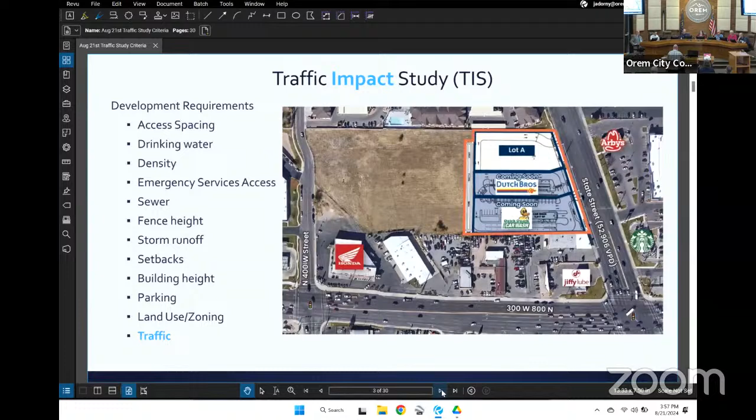However, traffic, you can count what's out there now, but after that, it's kind of a prediction. And so we're trying to predict what's going to happen. And that's where usually the disagreements happen, right? And so you can have 4 traffic engineers present something and they're all different because of the data going in. So we try to limit that confusion. I kind of said this a little bit boldly, that traffic will never get better, partly because it's hard to reduce traffic globally because people don't stop driving. So you can adjust it to different locations.

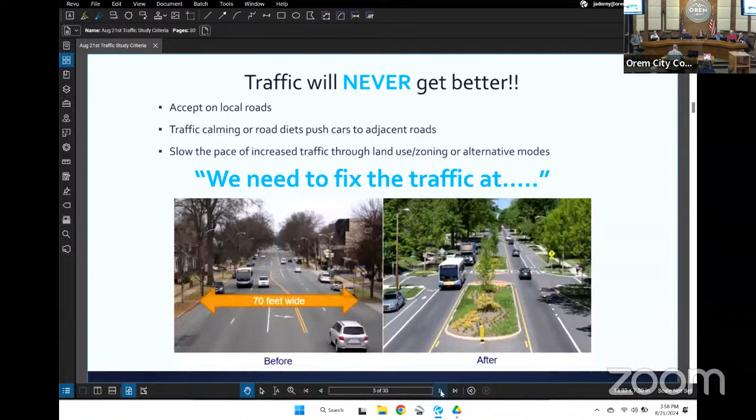I think I mentioned this. We need to fix traffic at this location. You've probably heard it or said it yourself. We can probably fix traffic at a spot, but it's going to push it somewhere else. So I don't see, and maybe someone can have an opposing argument, but I don't see traffic ever going down as a whole,

So when engineers say we want to widen the road, we don't do it in pipe lengths, a 10-inch pipe, a 12-inch pipe. It's 24 feet. That's the minimum you can widen the road to get a lane in each direction. So it's a big deal. And we recognize that, but that's the thinking of it. We want traffic to move better, but we also don't want quality of life down. So it's definitely opposing things.

I mentioned this humorously. Traffic studies have layers. That is because as we create a traffic study, we're adding conditions to it. I think you mentioned, Britton, we have an existing condition that we can quantify, and after that, it's a guess, right? So we look at the traffic now, that's measurable. Then we look at traffic in 5 years, that's an estimate. And then we look at traffic in 5 years with this project on top of that.

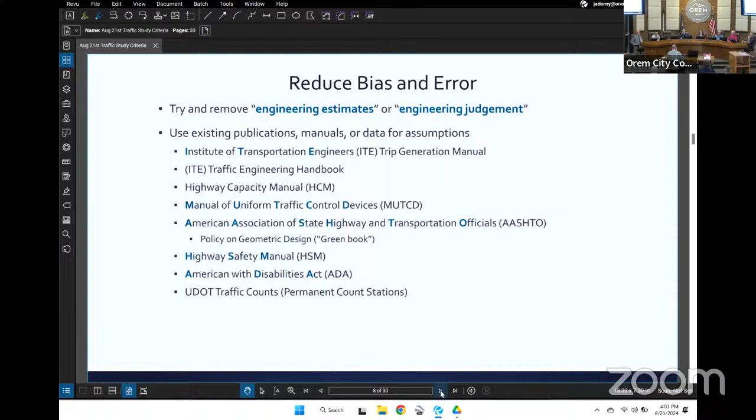And what we use is UDOT has permanent traffic counters all over the place. We try to find them close by. When I say close by, it could be 3 or 4 miles away. And then we just get an average of what's going on based on that data, because they count every day, all day. So there are permanent count stations. We try to get, again, the best data we can.

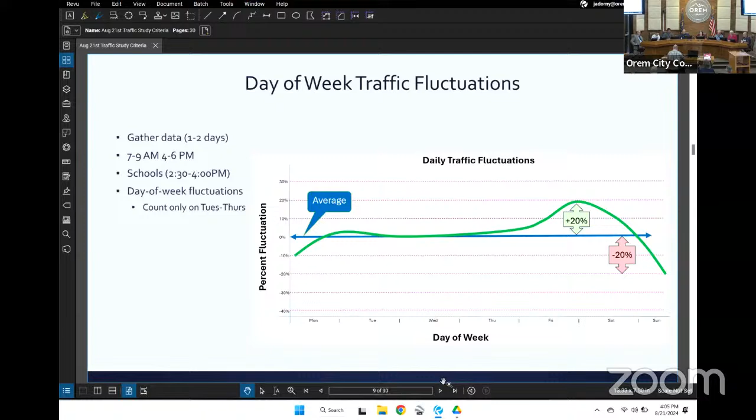But the point is that we want you as planning commissioners to know that if a traffic study is done based on our specs as a city, this is what they're supposed to be doing. And that's what we check. And so by the time you get a study, we've reviewed it 2 or 3 times, and I ask the developers, give me your trip generation and your distribution first before you do anything. Because if you get that wrong, everything else is wrong after that. So that's what we try to do for them.

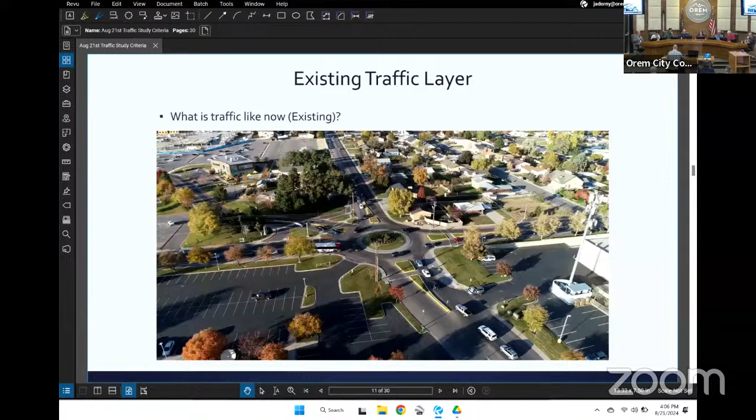And again, we talked about what is traffic like now. I don't know if there was a video link to this, but this is the UVU roundabout. I think we're hovering above a church building and Krispy Kreme is to our back, and University Parkway. So we look at traffic counts from an existing standpoint. What's the queuing doing? You can see a UTA bus over here. Are they backing up onto University Parkway? And so the existing condition tells us a lot. And this is a drone picture.

We talked a little bit about traffic modeling. A way to predict future traffic is using MAG's and the WFRC's traffic model that covers from Payson to Brigham City. So as part of the master planning process, we made that more detailed. If you look at it like pixels, MAG might have one big pixel for this part of Orem. We come in and make it smaller and carve it out better. So when we do our own master plans and studies, it's better quality because they just can't do that much detail. So we look at WFRC's and MAG's model.

We also look at the local micro simulation models. We'll talk about that. And then what we try to do is, I think I showed this last time. Looks like my browser doesn't like it.

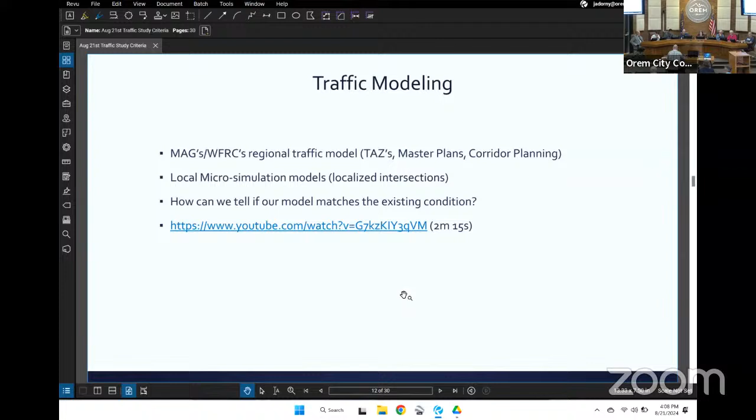That was a little simulation model that basically crudely tries to duplicate what you see in real life. And if you know that your model doesn't duplicate real life, how is it going to duplicate the future correctly? So we have to go through and modify the model to make it match what we see in real life to establish a baseline. And then after that, it's like, okay, if this matches now and we increase the volume here, then we trust it. But there's no way to confirm it because you're looking in the future. But we do our best to do that.

You mentioned trip generation. It's basically how much traffic the site is going to generate. And there's an ITE, or Institute of Transportation Engineers, trip generation manual. It's a national manual. It's this thick, and it's got land uses, bowling alleys, C-stores, gas stations. They put out a request for data. They're lagging. They're always 6 or 8, 10 years behind because new things show up.

And if it's a redevelopment project, so if you're tearing down an apartment complex and you're building a higher complex, you're supposed to take out the traffic from that complex and subtract it out of the new traffic so that there's a net gain or loss. And if it's new construction, it's just all new trips. It's just 100% new.

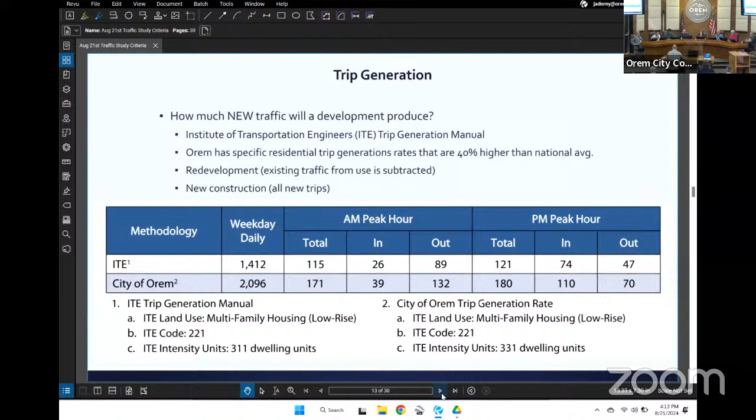But once a McDonald's is built, no one goes back and says, did we get that traffic right? You know, because there's so many other things affecting just that area. So let's see, speed it up here because we're getting close.

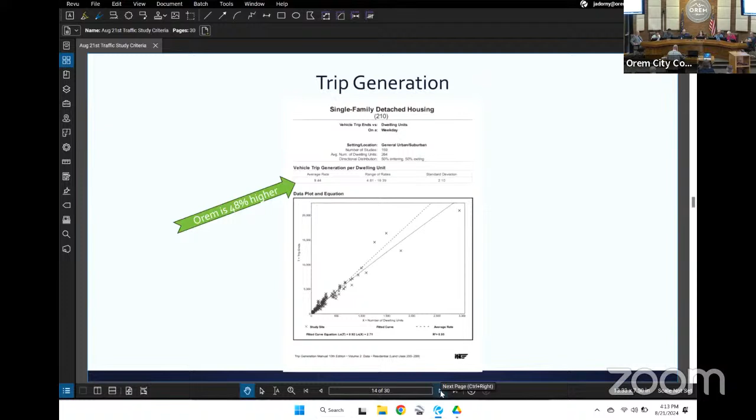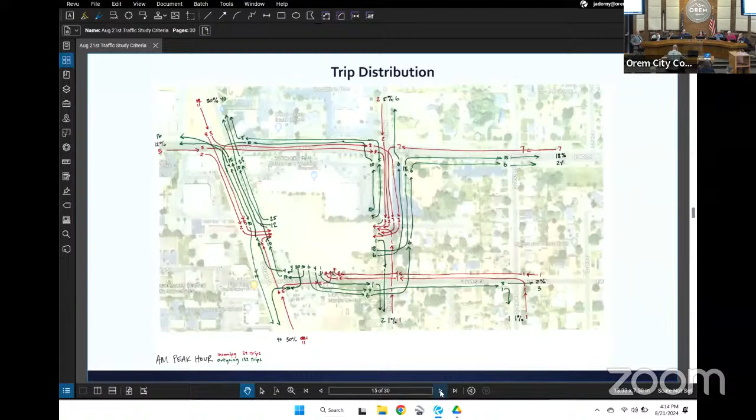Trip generation, this is just a page of the manual. Some of the data, we can go through it, but that's what we look at to say, okay, those lines and those little dots have to do with where the data points come in, and it has to do with the average. This is an actual drawing of people trying to estimate where traffic will come and go. It's a manual thing. You actually physically put in, if I was driving down State Street and I wanted to go over here, how would I get there? And this is what we review as part of a traffic study that comes in.

We talked about pass-by traffic. If you're a McDonald's or Chevron, you're going to want to go on a road that has a lot of traffic because people aren't going to go out of their way to go to fast food. They're going to pull out and go. And so depending how far people will go out of their way to go to that item and that site will depend on how this diverted link down here, these diverted traffics will go.

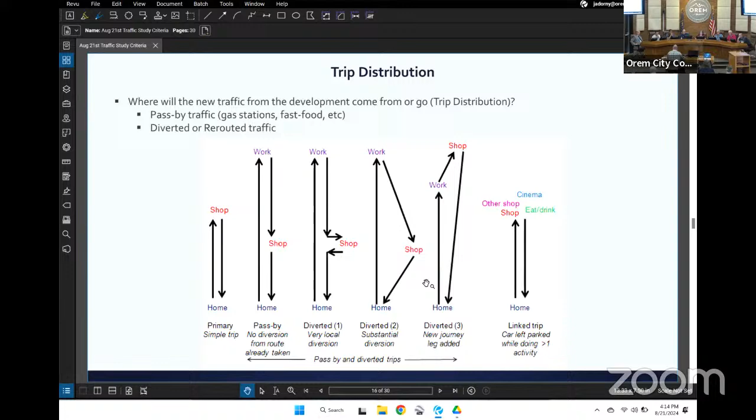And different land uses have different diverted links. When we do a traffic study for Chevron, 75% of the traffic is not new. It's just, they're stopping there because it's convenient. But if you're a dental office, 100% is new, because who's going to stop at the dentist on a whim? So depending on the land use, we look at how to affect the diverted links.

We talked a little bit about output level of service. This is where we get D. These are the parameters of how the program spits out level of service. It's based off of the average number of seconds each vehicle waits at a light. So if you're at an unsignalized intersection and you're there 30 seconds, it's level of service D. Now, oftentimes you wait at a light, you just hit the red, you're there for 2 minutes guaranteed because it's a 2-minute cycle almost everywhere.

So it's average and it's an estimate, right? It's a black box trying to duplicate what actually happens, because you have reaction time. And if you notice with the cell phones, people are like, what are you doing up there, right? There's a lot of honking going on, but there's a lot of people on their cell phone looking, and then all of a sudden it's green, and you'll notice that reaction time due to culture and society is way different. Now, I don't know if that's accounted for, but that's an issue, and that's calculated.

If it's an area that has a lot of recreation and you have a lot of visitors from out of the area, there's a factor to put in there that says they're unfamiliar, and so they're looking around. But if it's just a regular commute, so there's factors to adjust that. But this is kind of the calculation that the federal government came up with that we use.

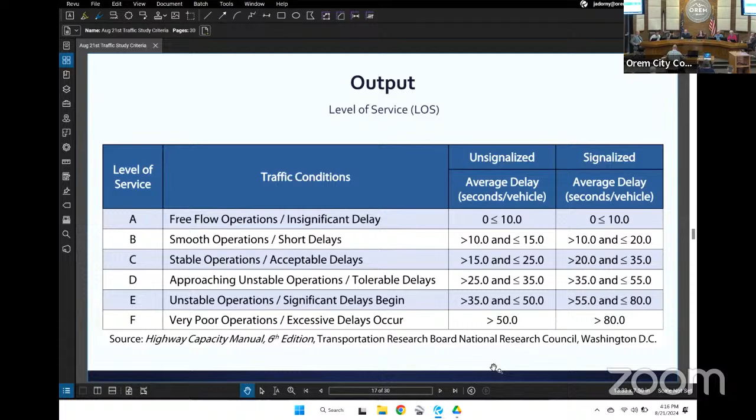Here's an output. It's hard to see, but all this data is all the output when we look at an intersection, US 89 State and 800 South: green time, pedestrian time, HCM platoon ratios. It includes all of these things. And that's where we can get in and try to make sure that we match the existing condition by messing with these parameters.

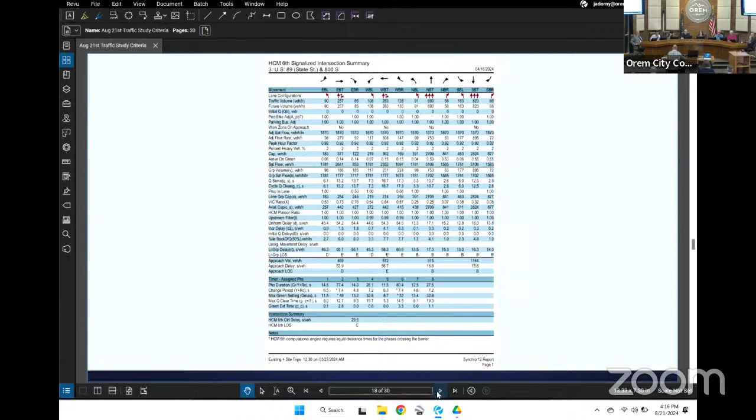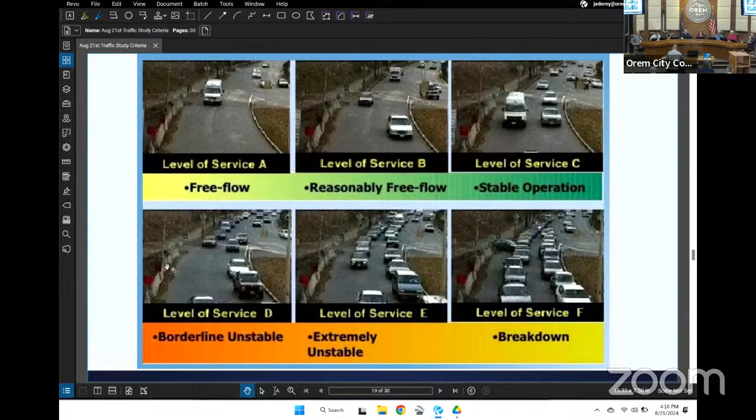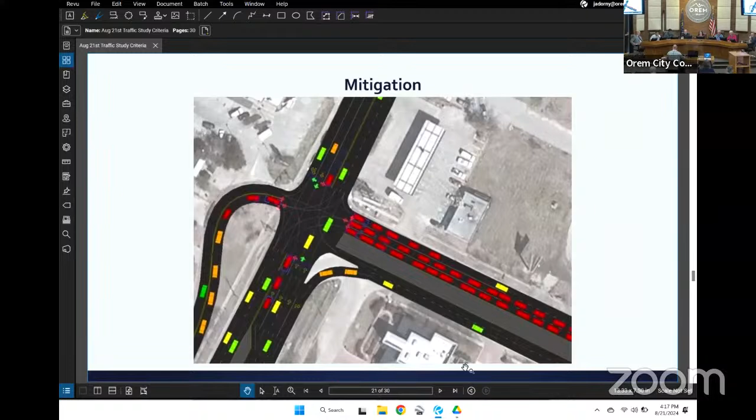So we wrapped this up last time with this slide, just emphasizing we rely on existing data and manuals that we try to direct information and get information from. We do layer the scenarios, as we don't just go, here's the end of the study, and there's nothing in between. There's always an in between: if we do an improvement in 2030, then it must be there in 2050, so we include it. But if it's not needed till 2040, we don't show it in 2030. So as you layer it and we look at mitigation measures, we include those in the next layer. So that's what the layering does.

We also match the general plan and TMP. When we look and do studies, we look at the neighborhood connectivity plans, vehicle queuing. Safety is a little bit obscure. We can look at crash data in the past, and you can look at safety from a sight distance and things, but sometimes you just can't quantify bad drivers. So we try to address that in a qualitative way. Sight distance is calculated based on clear zones. Mitigation is what we recommend at the end of a study.

And I throw road impact fees in there because when a developer says we don't have to do anything, we're fine, it's hard to read that from a traffic study. We don't recommend anything. They are paying impact fees that have to be spent on roads in the city within 6 years. And so there is an element that whatever they're building, there is an impact financially that they're paying.

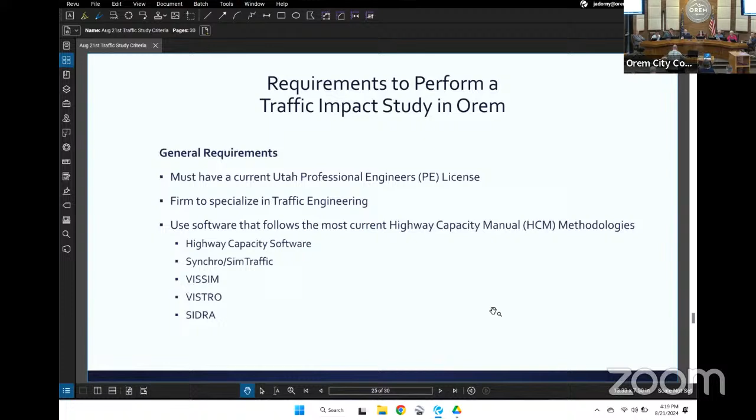We talked about the trip gen locally adopted. The national standard is 10 trips per house per day. Orem is 14. That 10 is rounded up. It's like 9.32 or something, but it ends up being a 40+% increase from the national average. And we don't get much pushback; I mean, it is what it is. When we tell developers to change it, they do it, and they don't try to argue why. I think they just recognize the families and the schools that we have. I've already shown you this picture, just to emphasize that this level of service D is only during commute times. So that's what we're looking at.

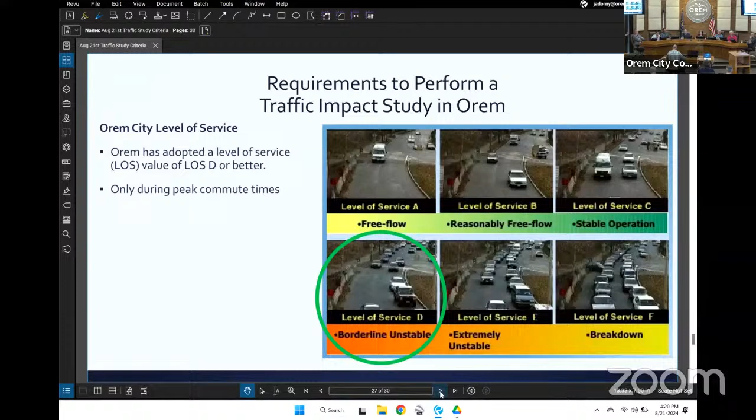We do have levels and tiers of traffic studies, similar to UDOT's. There's a level 1 and a 2A, 2B, and a 3 and a 4. And that has to do with, we're not going to make a developer do a whole lot of work if there's 100 trips per day or less, because that means there's 10 trips per hour in the PM peak. And so each one of these has a buffet of things to do, and it gets more complicated. We're not going to have them pull crash data on a level 1. We can basically negotiate what improvements we need to do. And as you get more complicated, we make them scientifically prove why they think they can or can't do things. And so we rarely see a level 4.

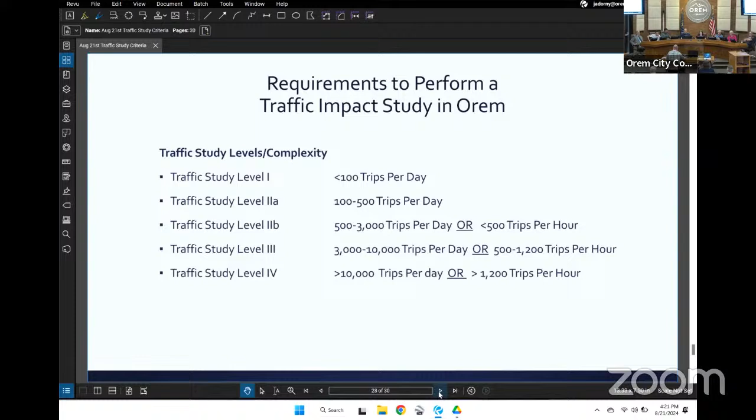The level of service output, this is kind of what determines what mitigation. The crash data: UDOT used to publish their high and low crash rates. That is no longer available. So it's hard to compare what a good crash rate is, and you're smiling because you know why. The liability of why are you showing this high crash rate for 20 years and not doing anything about it?

I live off Highway 6. It's called the death road. And I live by the intersection where they get hit every couple of weeks.

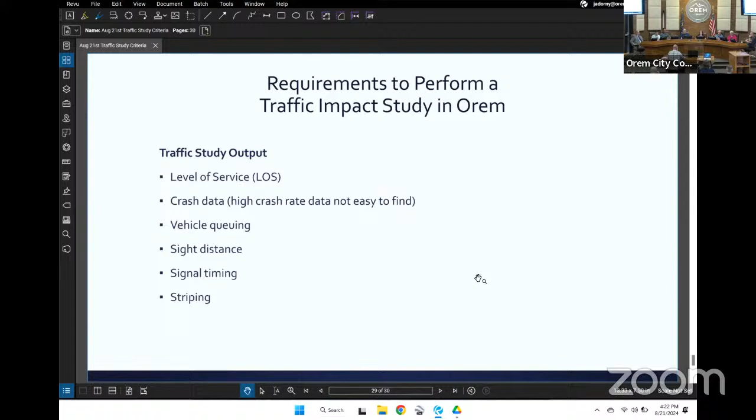So they don't publish what's high and low, and so it's hard for us to compare what's an acceptable crash rate, but it is available. If we have 5 or 6 in a year, we know that's a problem. Vehicle queuing, we can manage, and look at sight distance, again, triangles, when you're at an intersection, other bushes in the way. Signal timing, the traffic study lets us adjust our signal timings, and we look at striping and signing in general.

I think that's it. Give you enough time to eat. Thank you. Any questions? No?

I guess not. So, we have traffic staff in both Public Works and Development Services that get together and review all these things. It's not just me. We have technical staff that creates these Synchro models and looks at signal timings. And so there's a team of people that are involved with traffic, not just one person.

How does Orem compare with other communities in Utah County relative to the level of traffic? You said we're a D. Do you know what the other- Like most are at D. It used to be C and UDOT was D, and now they just can't maintain a C. It's just too hard. And the worst part of the day is probably 15 minutes on city streets. So if we can get through the 15 or 20 minutes, especially around school zones, for 22 or 23 hours of the day, it's okay.

So we as a state, I think, have it pretty good compared to others, but from a city comparison, it's just like every other metropolitan area. Provo and Orem is going to be worse. As you get out to areas, it's a little bit different, but Eagle Mountain, to get out there was a pain until they built roads. So it's just the high growth area versus established, and we're established. So it's pretty standard compared to our growth.

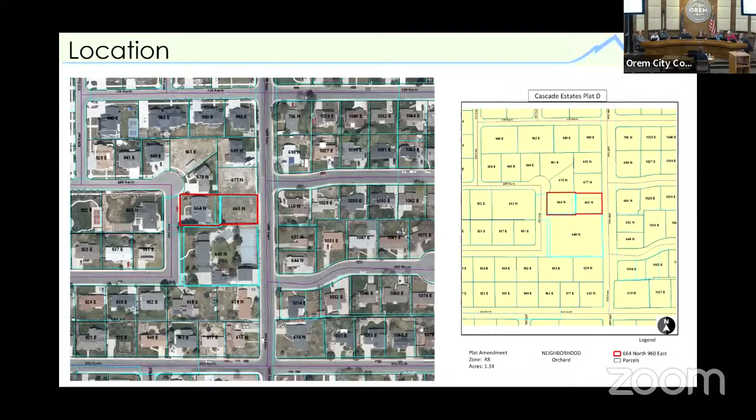All right. So we will begin with item 3.1, which is a plat amendment approving the plat amendment of Cascade Estates Plat D located generally at 664 North, 960 East in the R8 zone. Cheryl? All right, so this shows the location and where the two lots are. As you can see, it's in the R8 zone. And this will only affect that backyard property line between the two lots. It will not affect any other lot around them.

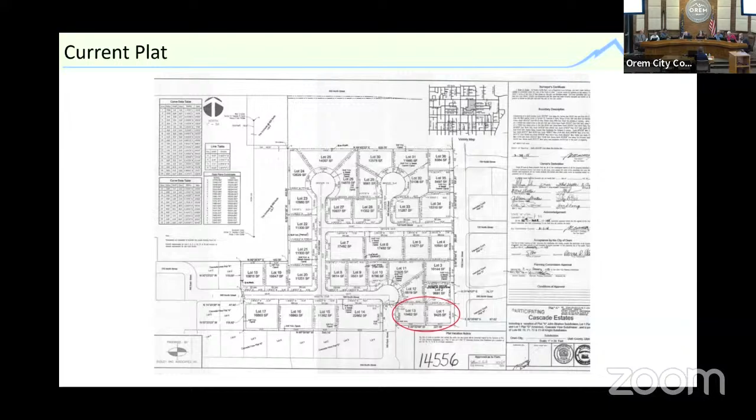So this is the existing plat showing where those two lots are. And this is the proposed plat. And you can see where the property line almost lines up, and it's a little bit to the east of the lot to the north. Oops, wrong way, sorry. But this one shows how it's moved west. So they're just moving that back property line. This is the two street views from the two ends of those two properties. And did you have any questions for me?

Any questions? Okay. Is the applicant here? And would they like to come forward? Do you have anything to say? Anything? Okay, then thank you. All right. We don't have any further questions. Should we move to motion?

Motion to approve the vacation of lots 1 and 13 of Cascade Estates Plat A and approve Cascade Estates Plat D located generally at 664 North, 960 East in the R8 zone. Do I have a second?

I'll second it. Okay, so Brendan moved and Jim seconded that we approve the plat amendment. Rod? Vote. Yes. Aye. Aye. Aye. Aye. Aye. Okay, that's unanimous. The plat amendment is approved.

Okay, item 3.2, also a plat amendment, amending all the HCA Timpanogos subdivision parcel A and approving HCA Timpanogos subdivision first amendment located generally at 650 West, 800 North in the C3 zone. Cheryl? All right, so this shows you where it's located and it is in the C3 zone. This came through, I think, in December or the beginning of this year to have this plat recorded.

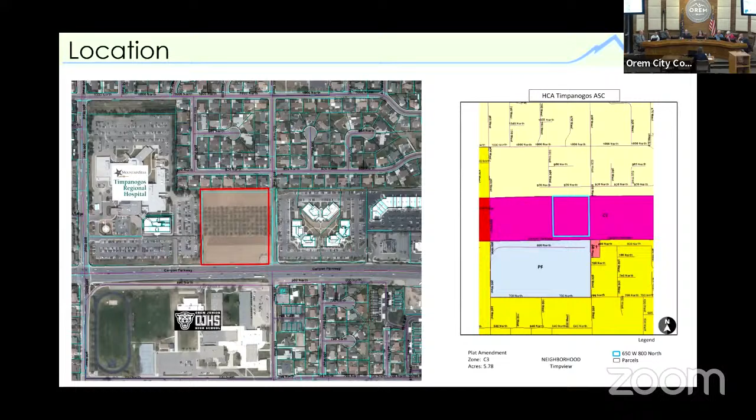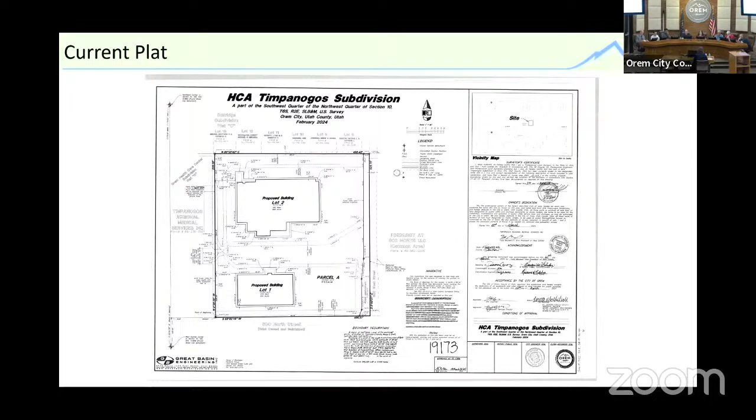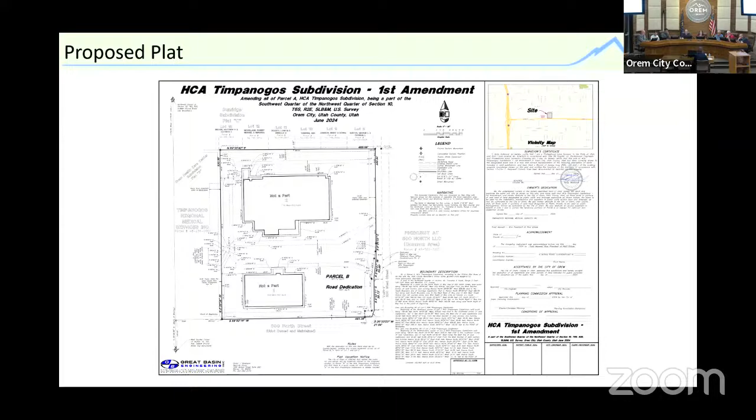In the meantime, they've been putting a new intersection in there at 600 West and 800 North. And this plat did not make it possible for that pole that supports the traffic signal to go. So this new plat is only changing that southeast part of the plat to accommodate that traffic signal pole. This shows what it looks like now. And did you have any questions on this one?

Just for clarification, is this so they can put the light to align it with Orem Jr. across the way? Taggart, I believe that's true, correct? I know we discussed that it might happen, so they're just doing it from the beginning. Yeah, this is actually a UDOT project. So they've hired a consultant to design that, and then they're building it. And then we have a small project on the south side of that intersection to align the vehicle lanes striping. Thank you. And we asked them to do this, so it's at the city's request. Okay.

Is the applicant here? Would they like to come forward? Okay, then if there are any other questions from the planning commission? Okay, then let's move to motion. Someone like to move? I move that we approve the planning commission recommendation to amend HCA Timpanogos subdivision parcel A and approve HCA Timpanogos subdivision First Amendment located generally at 650 West, 800 North in the C3 zone.

Do I have a second? Second. Okay, Rod moves and Britton seconds that we approve the amendment of the plat for HCA. Let's go to voting. Aye. Aye. Aye. Aye. Aye. Aye. Aye. Okay, the motion's unanimous and that plat amendment is approved.

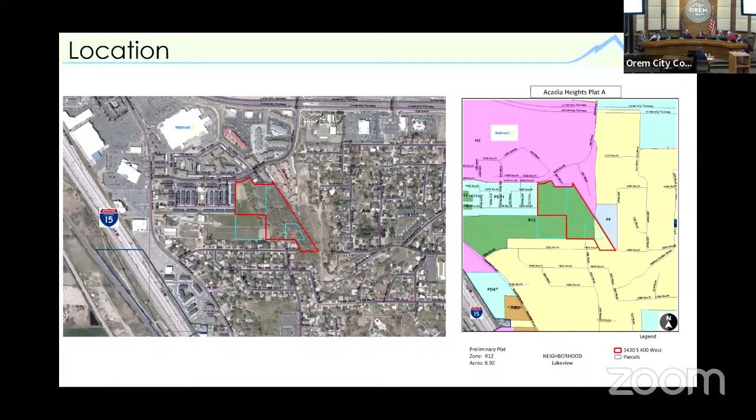Then we'll move on to item 3.3, which is a preliminary plat, approving the preliminary plat of Acadia Heights Plat A and B located generally at 1430 South, 400 West in the R12 and R8 zone. Cheryl? Okay, this shows you the location of this property. You've seen it before. It came through before as Sherwood Haven. It's now going to be Acadia Heights. And if you look at the zoning map, you can see that the green part is R12, the light yellow is R8. So this will have two separate zones. That's why there are two separate plats.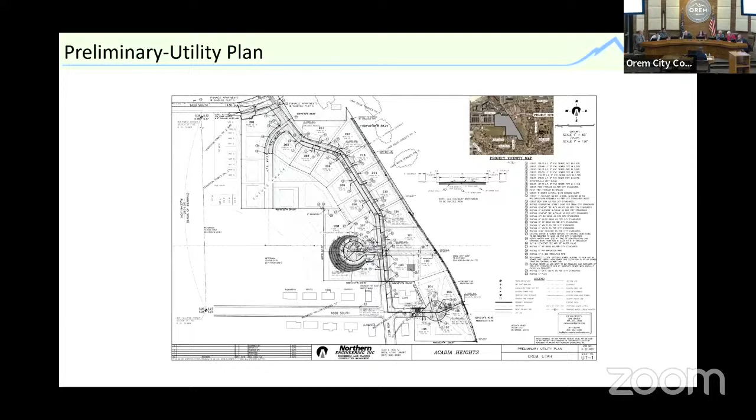This is just a preliminary utility plan. If you look on the south side of that cul-de-sac, there is going to be a 20-foot sewer easement that will extend through there to the property to the east. And that's at the city's request. And that's what the agreement in your packet was referring to, so that we will help them pay for that. That will give sewer access to those properties on the east. These are the grading plans. I'm not sure how much detail you want to go in on those.

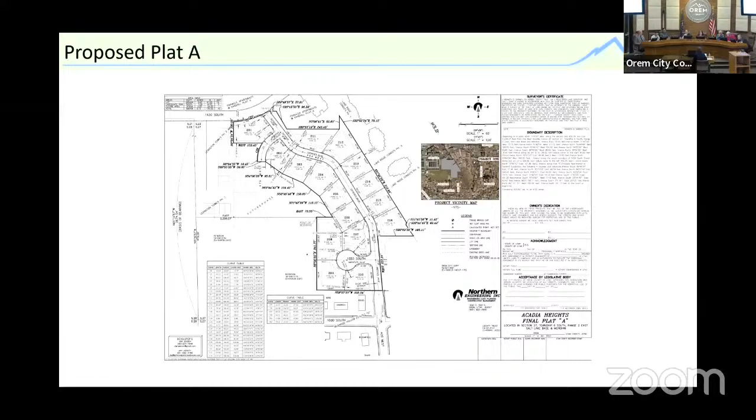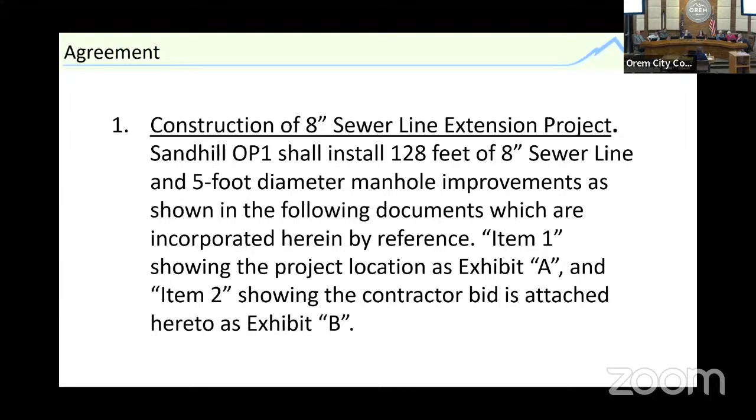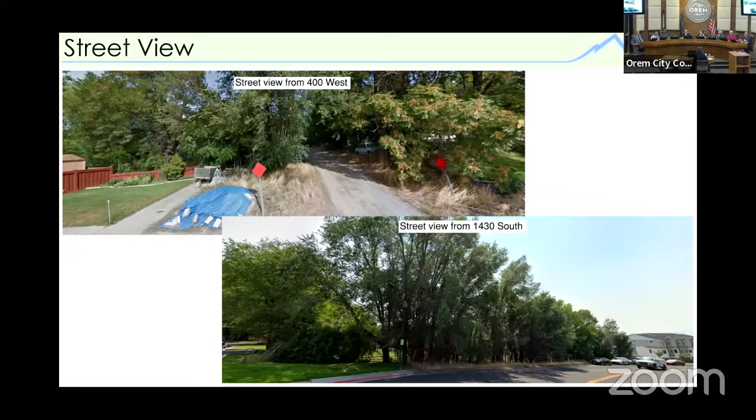I saw 25 homes, 25 properties. I believe there were 24. The applicant could probably clarify that. And what's the estimated space from home to home? I'm sorry, what was the question? The estimated gap from home to home?

So it depends on which zone it is. If it's in the R12 zone, they'll have 100 feet of frontage, and then the different setbacks are in the zone. In the R8, there's 8/20, with a minimum of 8 feet on one side, and then it has to total at least 20. So you'd have 8 feet on one side, 12 on the other. And I'm not 100% sure what it is in the R12. It's not as common. Is it the same? Thank you.

And this is just kind of a follow-up because we've had this property several times before: the city council voted to eliminate the other connections, but not the one between 1430 connecting down to 400 West. Correct. I'm not sure that they eliminated any of them. I don't think they did. But they didn't need to connect back up the hill, because I know there had been a lot of discussion about that. Yeah.

So this will connect through from 1600 South up to 1430 South. Okay. And that's why it had to be noticed, because it's through a connecting street. Yeah, it will connect from the north to the south, and then the one connection that's not going through would be the far south end going through to the east. That one's not connecting. And I assumed that by the cul-de-sac. And that's nice that you're still going to get the sewage up so that those properties aren't landlocked. So this 16th South will be a cul-de-sac. Okay. Any other questions for the city?

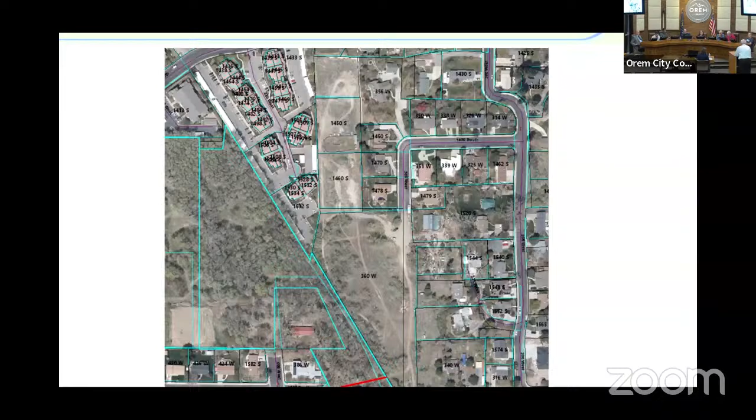That's my only concern, because we're doing some engineering for those property owners. And I question whether it's prudent to have this whole area be dead-ended with only one access. That's my only concern. Thank you. We have had extensive conversations about some of this in previous meetings, and that's partly why I'm bringing this up too, because we're seeing a cul-de-sac here instead of it continuing. I don't know if that's a Taggart question or a Cheryl question to answer, but thank you. Thank you.

Because there are still those concerns about those landlocked ones, so 1600 could still go down. It could, well, yeah, on the top of the hill. Yeah, so this could go up and down. So it's still there, it just doesn't go out towards I-15 anymore, but it still can go east. The connectors are still there on the map, so if we choose to draw the roads through there, we can.

Well, the question is, would they finish 1600 to connect with 300 West? There is a lot of opposition to connecting 1600 South through from the property owners there. But on the top of the hill, would that road get completed? Would you bring 300 West down to meet 16th South? Is it 360 West? Sorry, it's really tiny on my screen. You'd have to in order to get to the park, for one.

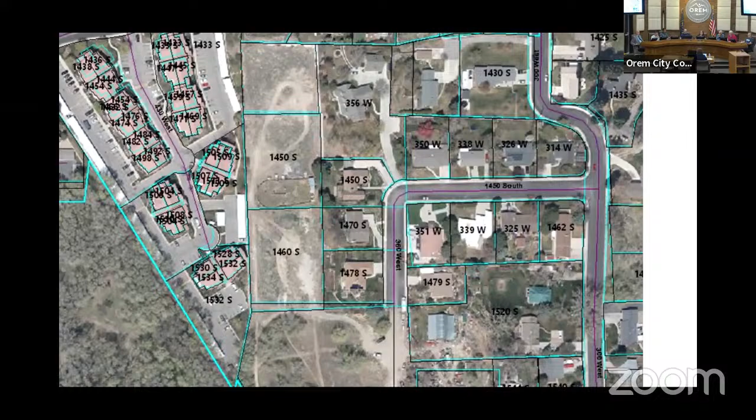We have looked at that and there is a challenge there with grades. There's quite a big drop off from the cul-de-sac going up to the east. And then at the top, where you're looking at developing, there's a 20 to 30 foot drop off from the east side of that city owned property down to the west side of it. So there are some challenges there. And like was just mentioned, with the private property owners along 16th South, that would all have to be worked out in order to make that work.

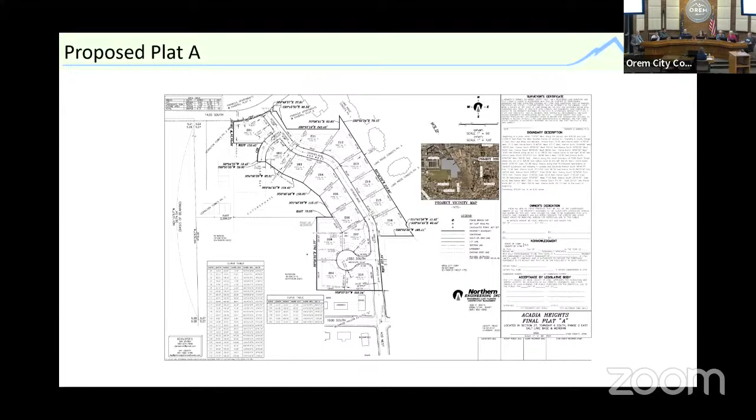So more conversation forthcoming. Yes, and then the extension of the cul-de-sac on the north, I think the only way to make that work would be to go to the city council and get some type of exception to the current ordinance, which is, I believe, 650 feet. And it would extend quite a bit past that, so it just would not be allowed. But those landlocked properties, this doesn't negate any of that, because these other properties are already in the way of going a different route anyway, so they couldn't go through the park.

Yeah, those are all good questions for development in the future. The issue in front of the planning commission is this current request for a preliminary plat. Does it comply with our code at this time? Those are important issues, I don't mean to minimize them. We are working on them as a city, and we'll work with any potential developers to come up with good solutions for those other properties. But whether this happens or not, the issue with the other undeveloped properties is still there. Yes, thank you.

You don't like our squirrel? I don't like ours. A rabbit hole.

No, it is somewhat valid because of the conversations we have had around this, but I do agree that it is not dispositive to what we're doing today, and that answers that question. We can come back to what's before us, because now we have cul-de-sacs under 650 feet, the road connections are there, and it meets code. It's R12 where it's R12 and R8 where it's R8. Do we have any additional questions from the planning commission regarding this property? Okay. Then should we move to motion?

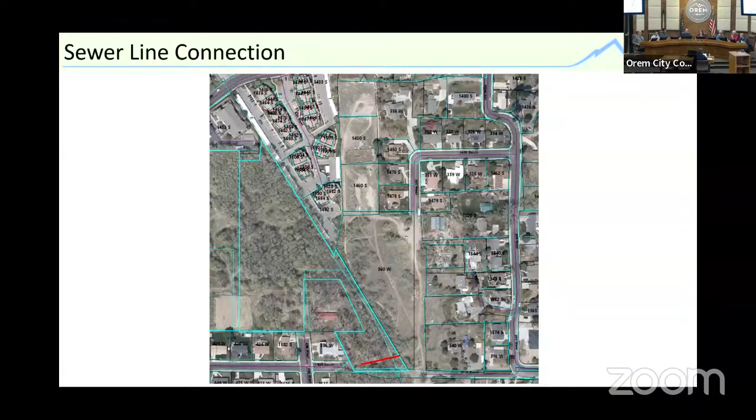I recommend we approve the preliminary plat of Acadia Heights, Plat A and B, located generally at 1430 South, 400 West in the R12 and R8 zones. Do I have a second? Second. Okay, Hasten just beat you. So Mike moved and Hasten seconded that we approve the preliminary plat for Acadia Heights. Voting? Aye. Aye. Aye. Okay, the motion passes unanimously, and that is approved.

We will move on to item 4.1, which is review and approve the meeting minutes for August 7th, 2024. They appeared fine to me. Any questions? Okay, then motion to approve. A motion to approve the minutes from the August 7th, 2024 meeting. Second. Okay, so Britton moved and Hasten seconded that we approve the meeting minutes from August 7th, 2024. Aye. Aye. Aye. Okay, the meeting minutes are approved.

Do I now look at you, Gary, and ask, do you have anything? No. We're good. Okay, then if that is all, I'd like to make a motion to adjourn. Second. Well then, Mike moved and Hasten seconded that we adjourn. Aye. Aye. Aye. Okay, we're adjourned at 4:53.